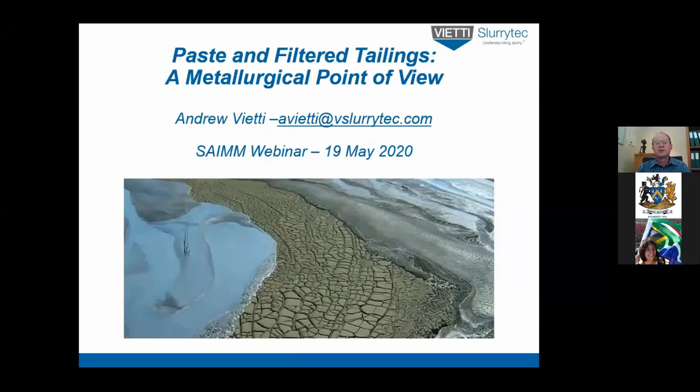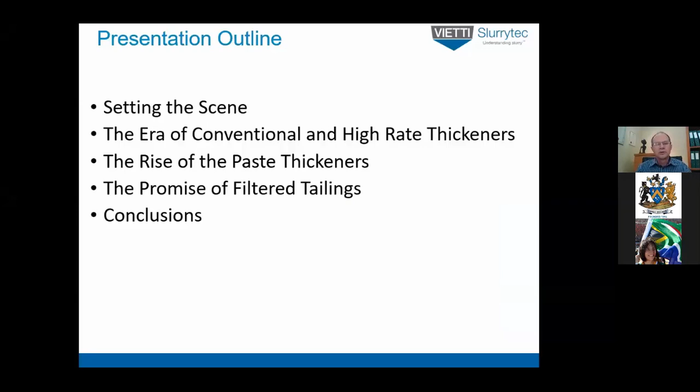Thank you very much, Isabel, for that very nice introduction, and thank you everybody for attending. Today I'm going to be talking about paste and filtered tailings from a metallurgical point of view. Just to give you an idea of what we're going to talk about: we want to set the scene, why we want to talk about this subject from a metallurgical point of view, why I think it's important. Then we'll go into a bit of a history of paste and thickened tailings, starting with the era of conventional and high rate thickeners, then lead into the rise of paste thickeners, and end off with the promise of filtered tailings, and then some conclusions.

So why do we really want to talk about this? Well, from my point of view, when people talk about paste and thickened tailings in a forum or in a discussion, it's largely viewed from a geotechnical point of view, and the metallurgical aspects, the dewatering processes, are largely sort of a sideline issue. There's a good reason for that - it's not just because people don't like metallurgy. Ultimately in this field, the tailings engineers, the geotechnical engineers, carry the legal responsibility for the tailings dam. They've designed it, they've operated it, and if something goes wrong, they take the legal responsibility for that. So it's a very important subject for them.

After the recent failures that we've all seen in Brazil, the International Council on Mining and Metals in 2019 initiated a global tailings review, which really focused on the geotechs, on how they operate these dams, what methods they use to build the dams, the ways of looking at them, reporting on them, etc. Also in early days of paste and thickened tailings, there was an initial design philosophy largely driven by the geotechs, saying that the design sequence of this tailing system is opposite to the process flow direction. So the geotech would say, I need a tailings dam that sits at a 2-degree stacking angle, and for that I need the material to have a yield stress of so much. So the pipeline and pumping guys had to design their system to handle that kind of rheology, and then it was expected that the thickeners would produce that material and it would all work.

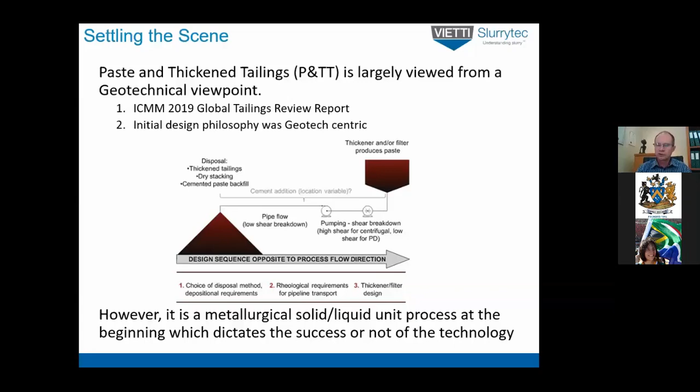So we start looking at the era of conventional and high rate thickeners. I'm going to take you back a bit of a history lesson to show where it's all originated from.

Around 150 to 170 years ago, the first centrifugal pump was exhibited in France in about 1851. Then the big steps occurred in metallurgy with Nobel and mining. Nobel invents dynamite in 1865, which led to the possibility of large-scale mining. Then the ball mill and jaw crusher were developed in Cornwall for the tin mines in 1880, giving a big jump in the amount of material you could handle for the comminution phase.

And then the really big one was flotation. The flotation recovery process started in Broken Hill, Australia, in 1902, which started the whole hydrometallurgical process. For that, water was a big component, so people started having to think about recovering and recycling that process water.

So in 1905, John Dorr invents the first thickener as we would know it. The design has largely remained exactly the same as that first thickener. There's a picture in the bottom corner showing a conventional thickener at the Bird Camp mine in Colorado, about 1920, and as soon as you look at it, you recognize that unit process immediately.

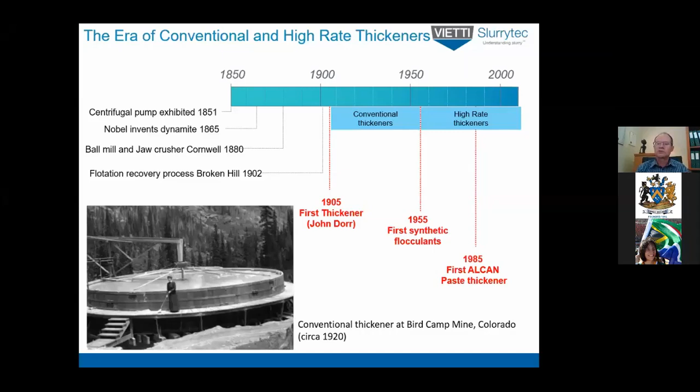So a conventional thickener is something like in the top photograph on the left: large diameters, up to around 150 meters diameter, very low flux rates - that's the solids throughput, tons per square meter per hour. They often had a center-driven rake drive, or when they got really big, they became peripheral rake drives because the torque and mechanical integrity became such an issue.

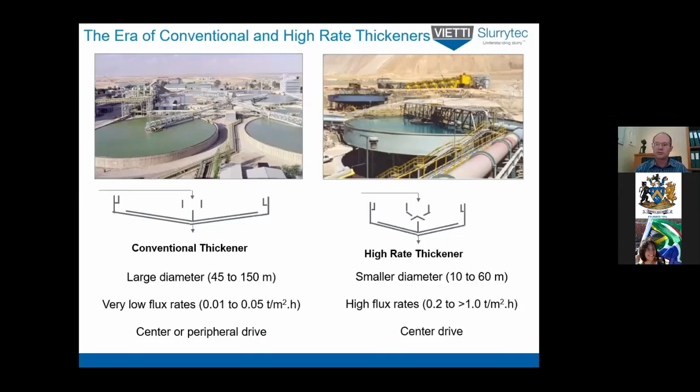After flocculants were introduced, we call those thickeners high rate thickeners, and they obviously had much smaller diameters. The flux rates were orders of magnitude more than the conventionals, and they were generally center-driven - the drive was in the center of the unit. That's kind of the workhorse; 95% of all tailings these days are treated by high rate thickeners.

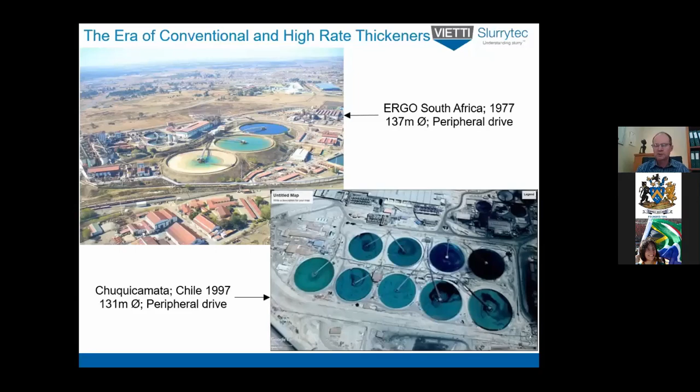Up into the late 70s and 90s even, people were using these high rate thickeners, but on a huge scale. You can see the Ergo ones now running at the DRD plant - they are 137 meter diameter peripheral drives. Big operations in Chile, like Chuquicamata, also have massive thickeners, 131 meter diameter peripheral drives. I'm mentioning peripheral drives because I want to come back to it later in the talk.

So from a metallurgical point of view, what's going on? This is a graph nicely describing the performance of a dewatering unit in terms of water loss, cubic meters per ton of head feed. As you dewater, you become more efficient, you thicken the underflow more, you recycle the water better, so you use less top-up water. Your water loss curve starts dropping down, becomes more efficient, and at the same time your underflow solids concentration gets thicker. A nice way of describing the thickness of the underflow is the sheared yield stress of that material.

This curve is particularly for diamond tailings, because I've got a lot of information on it, so it makes sense to me to do it on diamonds. If you were a typical platinum or gold miner, you'd say well, 40% solids concentration, you've got no yield strength. But this is because in diamonds, the top size going to tailings is quite coarse - around up to 1 millimeter in some cases, or generally about 500 microns. So when you've got a slurry at 500 micron top size at about 40% solids, it's still quite watery.

Just looking at the two unit processes, conventional thickener going down to high rate thickener: in the case of diamonds, at a conventional thickener you get about 30% solids out the bottom, and high rate you can easily get 45%. But if you look at the rheology of that underflow, it's still pretty watery - it's got no yield stress, so it behaves as a Newtonian fluid.

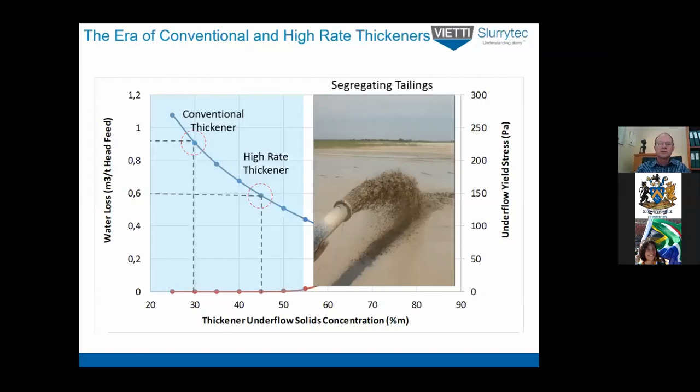So it pumps like water, and that's quite useful for the geotechnical engineers. They use those segregating properties of the slurry, of the Newtonian fluid, to actually develop their construction methods.

The coarser solids are deposited on the outside of the wall, and the fine stuff gets deposited onto the inside of the wall. That's probably a lot more stable, but also it's a bit more expensive to operate.

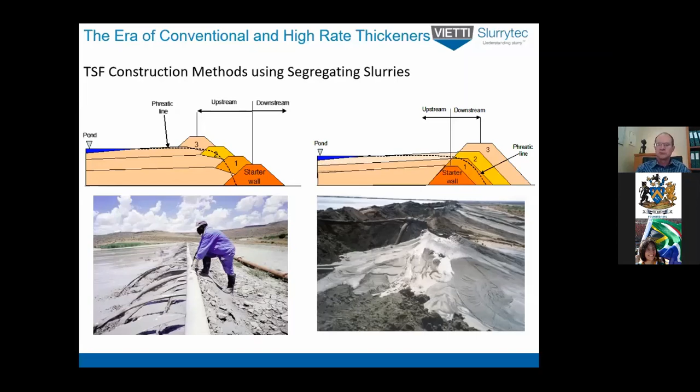That upstream method has been used extensively and very successfully, especially in South Africa. This is an example of a typical ring dyke upstream TSF, tailing storage facility, construction. You end up with a containment basin essentially, where the walls hold the structure together. It's got a concave profile, and in the center of this basin you contain the fine solids and any water that might accumulate.

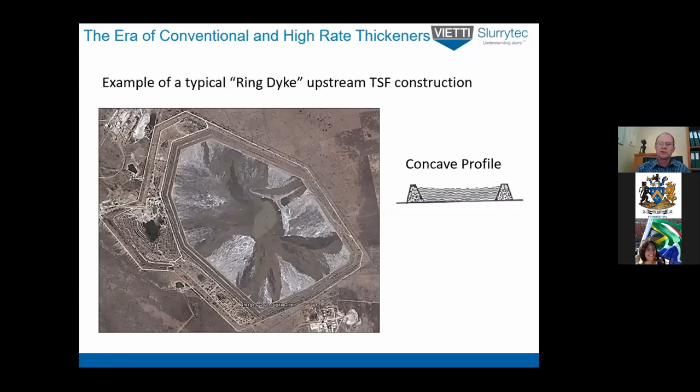These things were operated very successfully right up until sort of the early 70s or so, when things started to change. The question is, why did these start to change? Why did they start becoming a bit more risky?

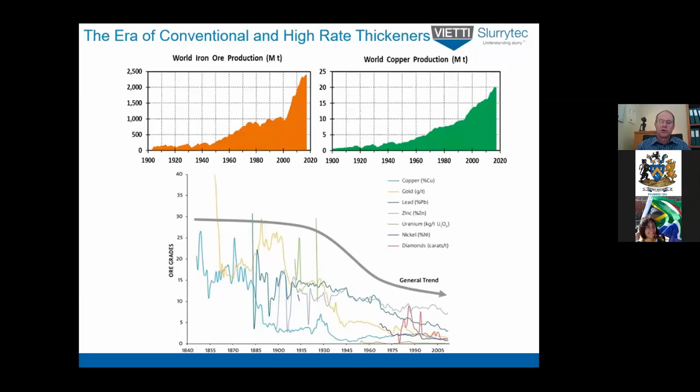It goes back really to the demand for minerals and commodities. You can see in these two curves here, this is the world iron production on the left, world copper production on the right. But from about the 60s, the demand for these metals started rising exponentially. So there was a huge demand for metals and from mining, and at the same time the ore grades were becoming poorer. So the general trend was that the ore was getting less rich, but there was still a massive demand for the metals, and so production volumes just had to increase, and obviously then tailings volumes increased.

This is some very interesting comment that was made by Andy Robertson, owner of Robertson GeoConsultants, but more importantly one of the co-founders of Steffen Robertson and Kirsten, SRK. In 2012 he said the largest mines have increased their production in terms of tons milled per day by an order of magnitude each 30 years for the past 120 years. That's quite an interesting comment.

If you look at this curve of time versus production, about 1920, in the early 20s, they were treating around 100 to 200 tons a day - that was the total production. Every 30 years or so it's been increasing up till today, where the largest mines and metallurgical plants, out in Chile for example, are producing in the order of 100,000 to 250,000 tons a day. That's 1 million tons treated every 4 days in some cases - that's a huge volume.

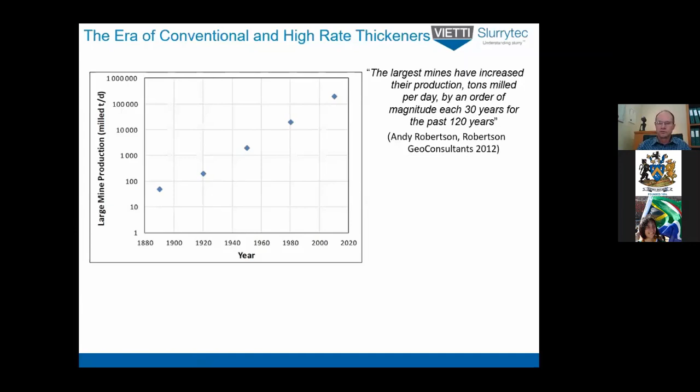At the same time, if you look at the world mine tailings failures, starting around the 60s, things started increasing. Before the 60s there were few serious tailings dam disasters, but since the 60s the numbers have been doubling every 20 years or so, and we can see the effects.

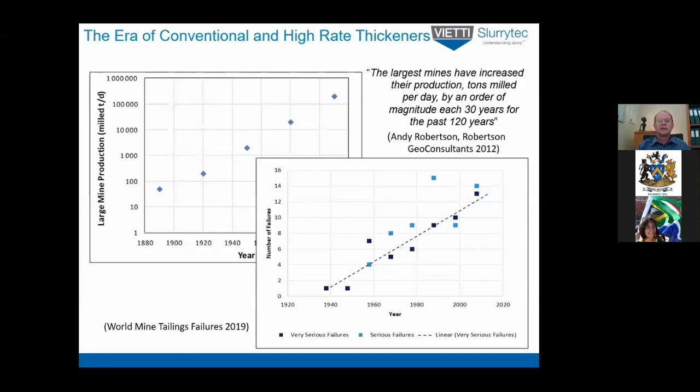Talking to some very experienced geotechnical engineers, one of the reasons seems to be that the TSF's rate of rise, in terms of meters per year, was kind of very low in the olden days, so the risk of failure was very low. But with higher tonnage, these rates of rise have been increasing, and obviously the higher the rate of rise, the higher the rate of risk associated with it. We end up more recently having a number of very serious tailings failures with the conventional method of thickening, high rate and conventional tailings disposal methods.

So for instance, Merriespruit, and they all seem to be related, not really to the technique of building the dam, but to the very fact that there's a lot of water contained on that dam. The presence of water makes these things unstable.

Merriespruit in South Africa in '96 failed because that particular day there was a very heavy downpour of rainfall, and the pool was quite big, and it managed to breach the side wall of the dam, and the whole contents failed. In Hungary, a red mud tailings dam failed, not because the containment structure was weak.

In fact, the containment structure was made out of fly ash, which is kind of a very weak cement, you can say. But because the water on the dam seeped under that corner there and started eroding away and caused the failure of the wall.

Mount Polley, the same thing. The foundations of the tailings were built on glacial till, which failed. And then obviously Brumadinho in Brazil, which was another failure because the dam also had a lot of water. The jury's still out on that one, but I'm sure it's going to come down to something like that.

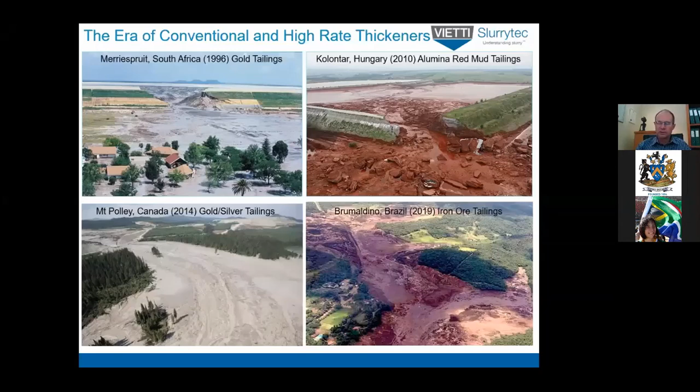So now, what can we do? This is now the rise of paste thickeners. The concept there was to develop a thickener that could dewater more efficiently to generate a stiffer tailings product.

So if we have a look at our graph again, if you were to feed kimberlite tailings to a paste thickener, you would end up with something in the order of around 60–65% solids. Now at that stage, you've got a yield stress in the order of around about 90 pascals.

And that difference now, the tailings there are non-segregating. So they do not behave as a segregating slurry. They are now a non-Newtonian fluid, and they have different flow properties.

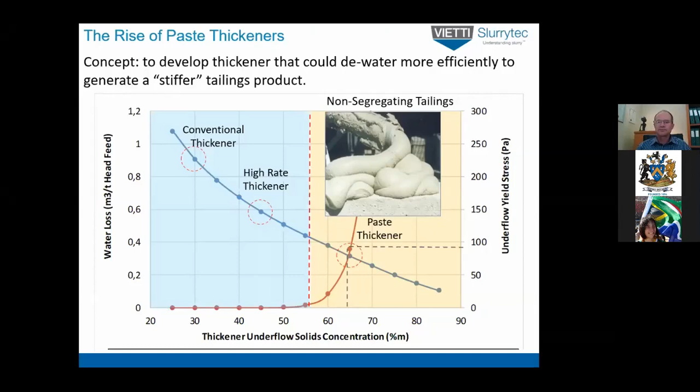On the rake, they had what we call pickets. In their case, they called them stirrers. Those enhance the consolidation properties of the mud bed. So instead of just relying on gravity to densify the mud bed, they introduced these stirrers, which could then have a little bit of shear onto that mud bed, but release the water. And so you get kind of an accelerated consolidation, getting higher solids density quicker.

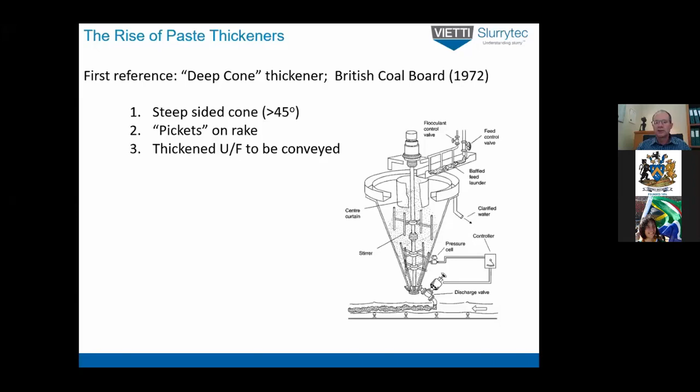And then in their idea, they wanted the underflow to be put onto a conveyor, which was really far-thinking at that time, which would be ideal if it was really true. What we found over the years is that taking a paste thickener material and putting it onto a conveyor really isn't feasible, because it's not really dry enough.

So where was it first applied? Well, the first applications found themselves in underground backfill applications using cemented full tailings. So in South Africa, people are familiar with backfill on the gold mines, where they use what's called hydraulic fill, where the tailings are basically classified.

The fines are taken out, and only the coarse material gets pumped underground, and it goes into the stope, and then it builds up like basically a beach sand. All the water runs out, and you're left just with the sand.

But in some cases, you need the full tailings because you need the extra tonnage to go underground. And the only way you can do that is to take the full tailings and thicken them up, and then add cement. That's called cemented tailings.

And the first application of that was at the Bad Grund mine in Germany in about 1971. And they achieved the paste probably by filtering their tailings. And then they added cement to that.

In Inco in Canada in the early 1970s as well, there was a mining engineer called Dave Landriault, who was very interested in paste backfill. And he actually developed his own thickener.

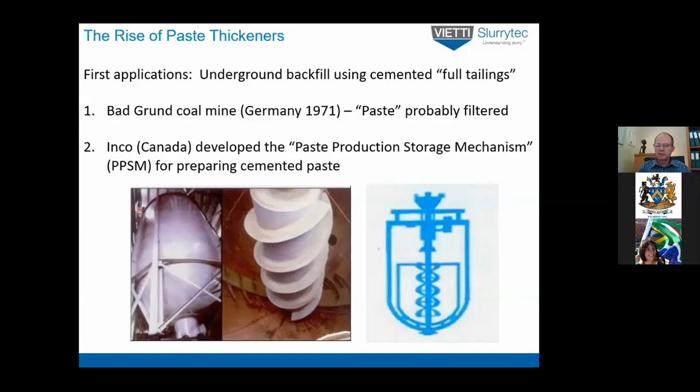He developed this thing called the paste production and storage mechanism, where you could prepare a thickened paste and then keep it moving like in a concrete mixer with that scroll. So they could add cement and keep it mixed until they needed it pumped down to the stope.

The first surface applications were in the 1970s as well, surface tailings disposal applications. And that was credited to Eli Robinski, who was a geotechnical engineer, a very far-sighted guy, who introduced the first paste tailings design at the Kidd Creek mine in Canada in about 1975.

The reason he did that was because he was forced to look at an alternative method, because the Kidd Creek mine in northern Ontario is located in an area where there's lots of muskeg. It's like a peat. And he needed borrow material to build starter walls of this dam, and there wasn't any available.

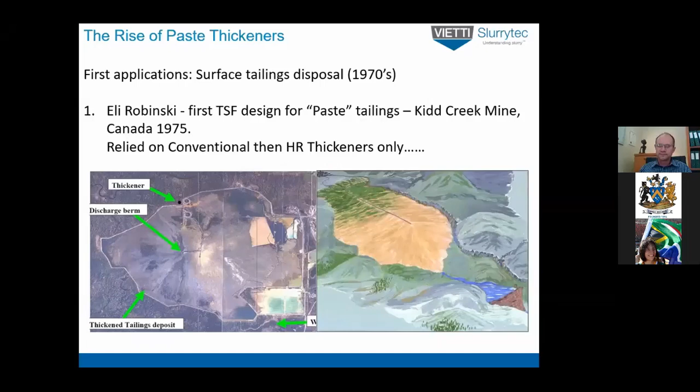So his idea, he did that, but the dewatering processes he had at the time were only high rate thickeners. He started off with a conventional thickener, and then they put in a high rate. So it wasn't really very successful in terms of its efficiency, but it was still the very first one.

But now, getting into the 80s and 90s, the first applications for surface tailings disposal and the first ventures into making a thickener really came out of the aluminium industry, the alumina industry. The two rivals there were Alcan in Canada and Alcoa in Australia. Very secretive industry, they kept all the information to themselves. They didn't want any competition.

So Alcan really developed what they termed a deep cone thickener, and they installed it in all their processing plants. They tended to be quite small diameters, sort of 10-meter diameter or less. They had a steep cone of about 30 degrees, high sidewalls, and rakes with pickets on them, which we called low-profile rakes.

And they came up with a really ingenious method, because they knew that if this material got thick enough, how do they get it out of the thickener? It became a big issue. So they developed what they called an underflow shearing system, so that the unsheared material in the tank would get sheared at the bottom of the thickener, so it would flow a little bit easier to get out.

And they had a central drive. The rake was driven centrally because of the diameter. The diameter of the thickeners were quite small, so they could get away with a central drive.

Alcoa, on the other hand, developed a high-density super thickener, they called it. And they took existing thickener design and basically made it stronger. So in Pinjarra in Western Australia, they installed this thickener. It was a 90-meter diameter, big unit. It was typically of the high rate design, so shallow cone, low sidewalls. They didn't have any pickets on their rakes, but because the rake was a box truss structure, those trusses really acted like pickets.

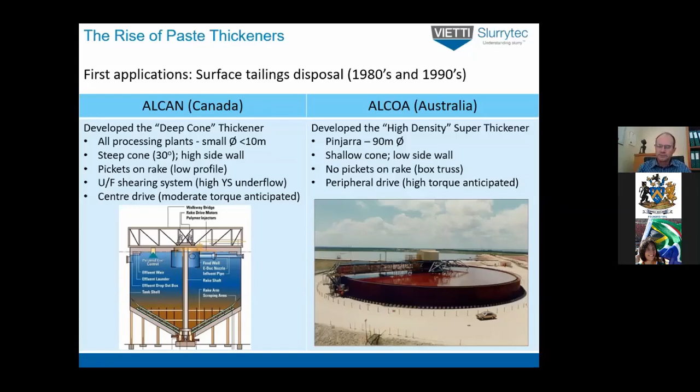So people started focusing on the deep cone. But anyway, both companies also developed their own methods for TSF construction.

So they developed what's called a central thickened discharge, or CTD method, where the thickened material comes out in the middle of the dam through some sort of fountain device, and it basically flows away and forms a hill. So you could see down at the bottom there what the profile looks like.

And then the alternative method was what's called thin layer deposition, where you would deposit the thickened tailings over a wide area, so it spreads over the land, and you layer it in thin layers that dry out. And this gave rise to also what's called down valley deposition. If you've got a valley, you could add it there, and it would run down to a sort of toe wall.

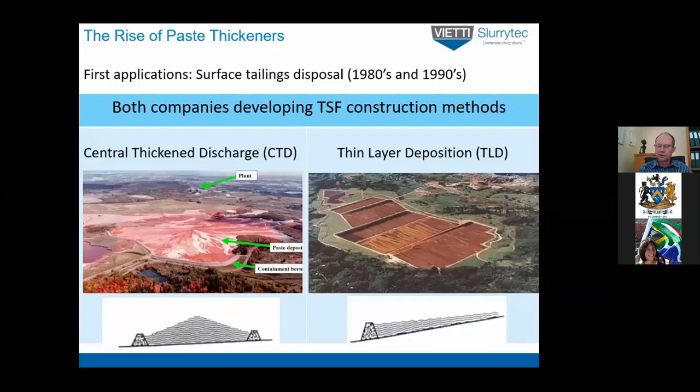So by the early 2000s, some Australian geotechnical engineers were already designing central thickened discharge dams. But again, the dewatering equipment was lagging behind. They all kind of had high rate thickening to develop the product, to generate the product.

So the two places we looked at in the pictures, there's Peak Gold Mine. You can see in the distance there, that would be the point of discharge, and then it kind of flows away. But you can see the material flows over a big distance, because it's not really thick enough to be contained or build anything of a structure.

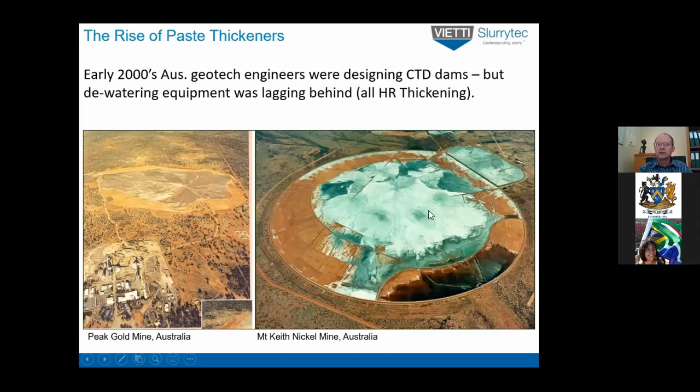And this is quite an interesting one, Mount Keith nickel mine in Australia. They had a very ingenious way. I think they had a central one in the middle, and then nine different rises around the edge to try and make a sort of hills in the landscape. That was what ultimately they wanted to achieve. But again, thickening technology wasn't there, so they didn't really generate these steep hills.

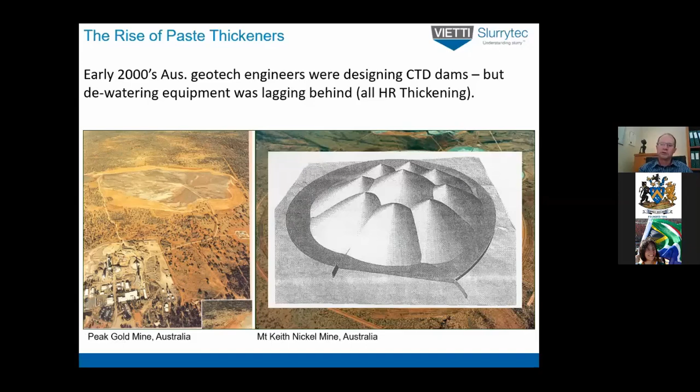So by the early 2000s, the two main paste type thickeners had emerged, and these were the so-called deep cone paste thickener, which, as you can see in the picture, wasn't very big diameter, more high sidewalls and a 30-degree cone angle, and then what's called a high density paste type thickener, which is more of a conventional design.

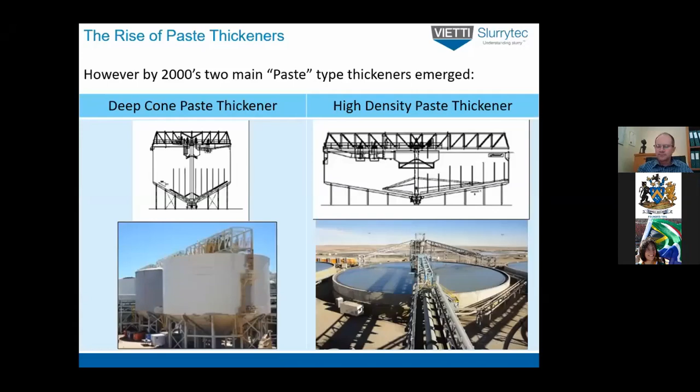So where were these applications in South Africa? This is one which is very familiar to myself - it was the ex De Beers operation at Kimberley, the central treatment plant, which is now the Kimberley Ekapa Mining joint venture plant. That was commissioned around 2000, 2001, and it was for treating diamond tailings. The feed solids tonnage was relatively high, 600 ton an hour.

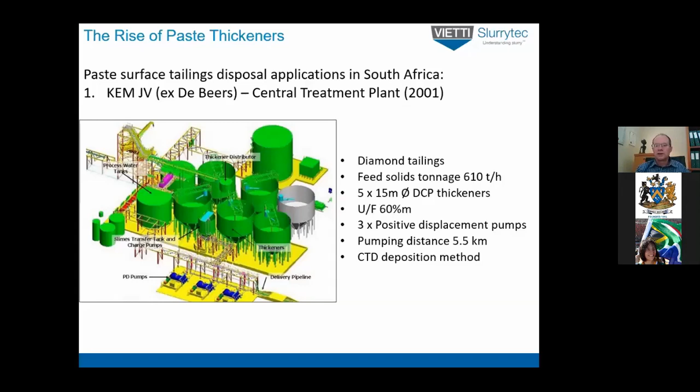There were 5 x 15-meter diameter deep cone paste thickeners installed, underflow solids concentration around 60% by mass. There were three positive displacement pumps to pump that tailings over a 5.5 kilometer distance to the deposition site. It was a central thickened discharge method, which many lessons were learned before we actually got it right. These are some photographs of the site at the deposition point.

Again, a very clever geotechnical engineer came up with this system, a unique South African design which he calls the wagon wheel. The idea was to distribute the tailings around that point of discharge, because previously the material would just flow wherever it felt like it. What he did was take advantage of what's called the plunge pool - there's a pipeline that runs underneath this ramp, it elbows up here, and basically open ends there, and the tailings flow out like a chocolate fountain in a way.

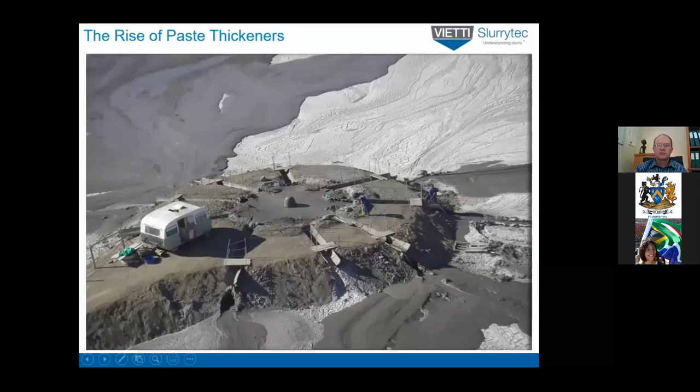It was quite nice, and it forms a plunge pool. He put spokes on this plunge pool with half pipes, and these half pipes were blocked with sandbags, and he would then lift that, allowing the flow to go in whatever direction he wanted. So that's a very nice design. There's a nice picture of how this material flows out - you can see it flows like lava. It's fantastic - very little runoff water, and it dries very quickly.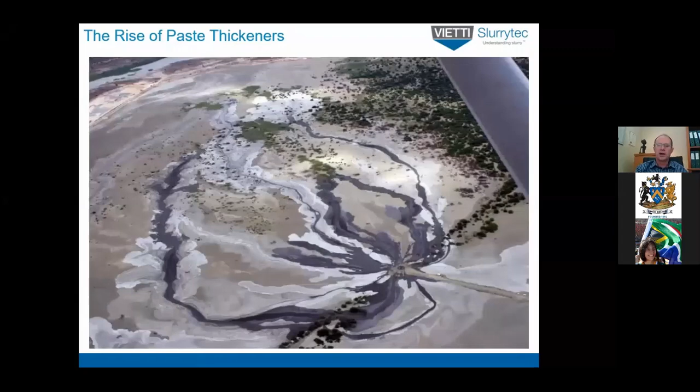I've got a small video of this here, so we'll go through that quickly. Play it quickly.

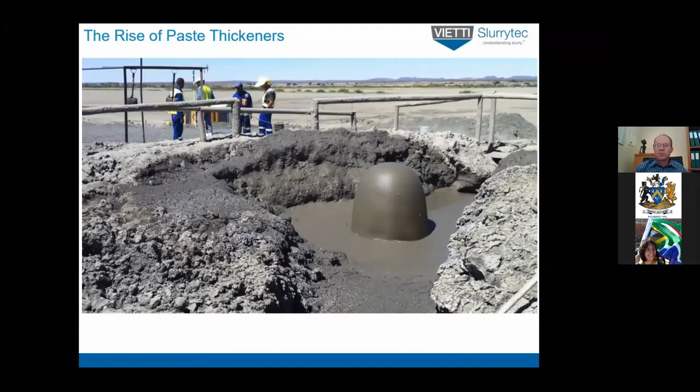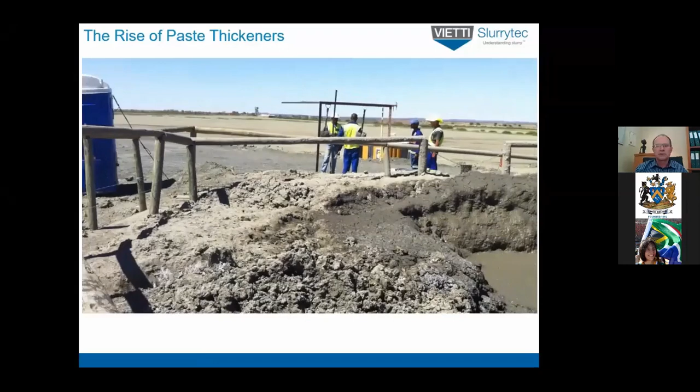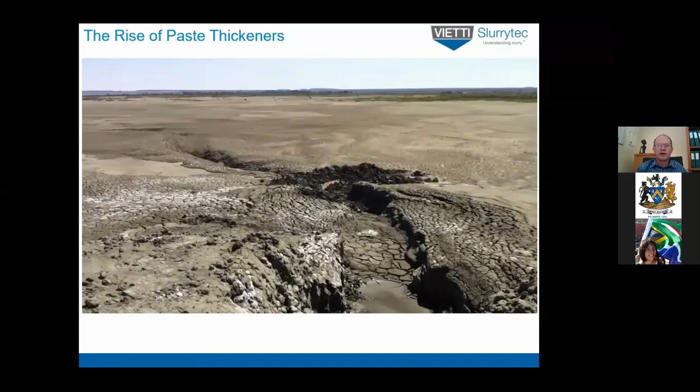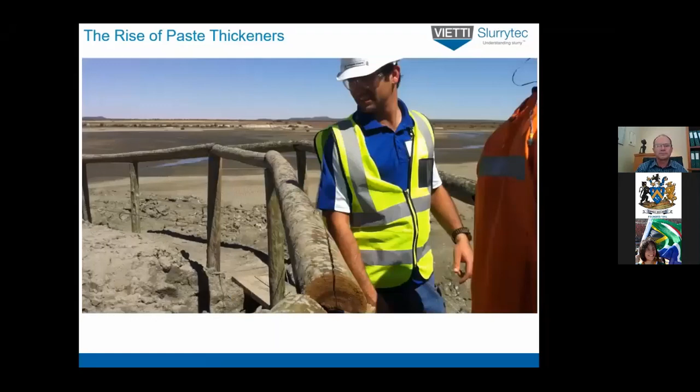So that's the end of the pipe running into the plunge pool. You can see there's no water - this dam is dry. There were obviously flows in this direction at some stage. It's a bit noisy because of the wind. This is where they were flowing out at one point, and then they let it dry. There you can see the tailings tunnel, where the new material is coming out. Okay, so that gives you an idea of how it worked.

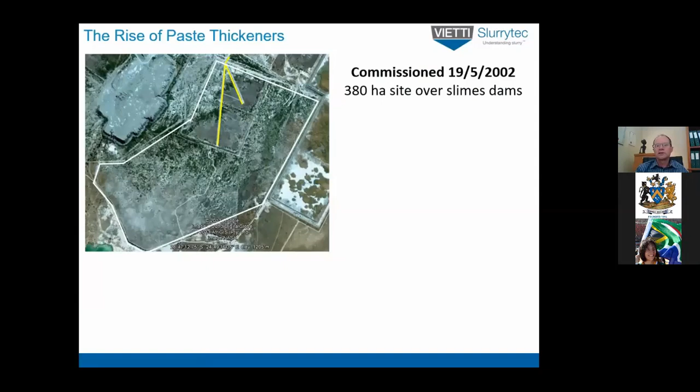It was commissioned in about May 2002 over quite a big area - it's a 380 hectare site. But the important thing is that this site has been running for 18 years and it's had one wall lift in all that time. After all that tonnage going into that dam, they didn't have to put in a new dam or anything like that. It's still running fine.

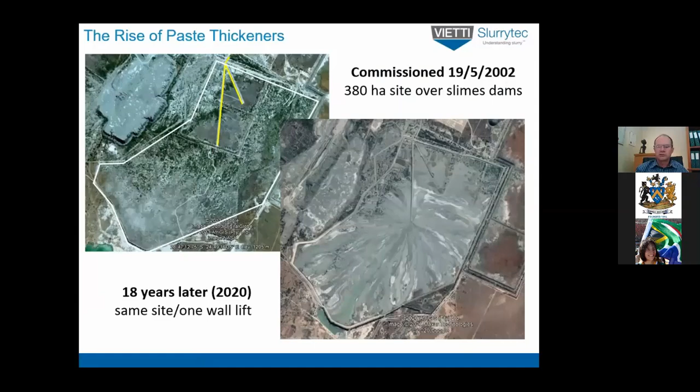Okay, so with all that, why then are paste thickeners not more widely used? We know that probably only about 5% of tailings are treated by paste and thickened tailings methods. After thinking about this, it seems like there are two main reasons for that - let's go through those.

One is the tank diameter and the aspect ratio for large tonnages. When I talk about large tonnages, I'm talking about 2,000 to 4,000 ton per hour treatment capacity, which is really limited to the big copper mines in Chile, Iran, and maybe the US.

In the early days, before 2000, when CTP was designed and commissioned, the maximum diameter you could get for a deep cone paste thickener was about 15 meters. They were too scared to build them larger - nobody had ever done that. So we were limited in terms of the number of tanks we could get, based on diameter.

Then the first big operation, Sarcheshmeh in Iran, was designed and built, and they could only get 24-meter diameter thickeners. So it had gone up from 15 to 24 meters, and they got twelve 24-meter paste thickeners installed at that stage.

Finally, then in the sort of 2013-14 or so, at the Centinela copper mine in Chile, we managed to get of the order of 45-meter diameter. So they put in 3 45-meter diameters.

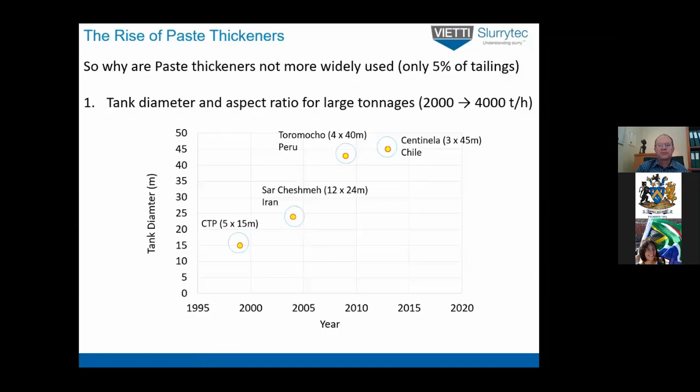So it kind of becomes impractical to have this thickener, the deep cone paste, for very large applications. And it makes more sense then to go for the high density paste kind of design.

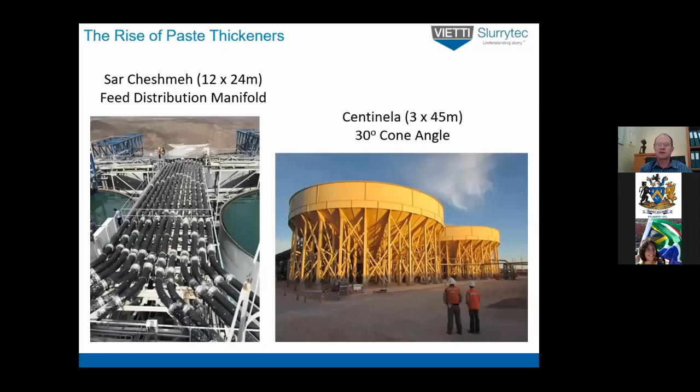The other one is what I've called the small matter of rake torque. This is quite important when people start talking about definitions again. In most definitions, when you see a yield stress curve, it's the sheared yield stress curve. Because the pump and pipeline designers and the geotechnical engineers, they deal with material that's gone through a pump and been sheared all along the pipeline, and it ends up at the tailings dam in a sheared state. So they're interested in the sheared yield stress of the material.

While the thickener guys are more interested in the unsheared yield stress of the material, because that's what the rake and the rake gear drive sees. So for a typical paste material, it's got a sheared yield stress of about 100 pascals at a particular solids concentration, which would be, let's assume, the design solids concentration. When you look at the unsheared yield stress, that can be at least 2 or 3 times greater than the sheared yield stress. So what the rake drive has to see is huge yield stresses, and so the gearboxes have to be really, really strong.

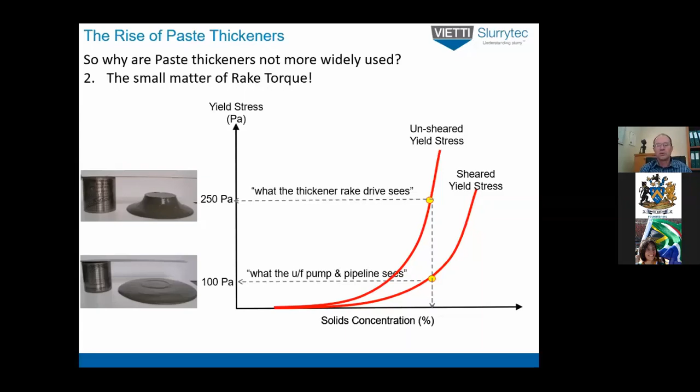Now it becomes quite interesting, because the way it's conventionally calculated or designed in the industry, the size of a gearbox for a particular application, is using this very simple equation. We must remember that these calculations were derived in the days of conventional and high rate thickening, where the slurry generated tended to be a Newtonian fluid. It didn't have too much yield stress, or if it did, it was pretty low.

So the calculation states that the maximum operating torque is defined by K, which is really an empirical number developed by the early thickener guys, times the diameter squared of the tank, times a factor which brings it to SI units. Now, in paste thickening times, K has been approximated or replaced by the approximate unsheared yield stress of the underflow at the target underflow density that's required. So you would go into the lab, measure the unsheared yield stress of the material at the target or design underflow density, and that would effectively be K.

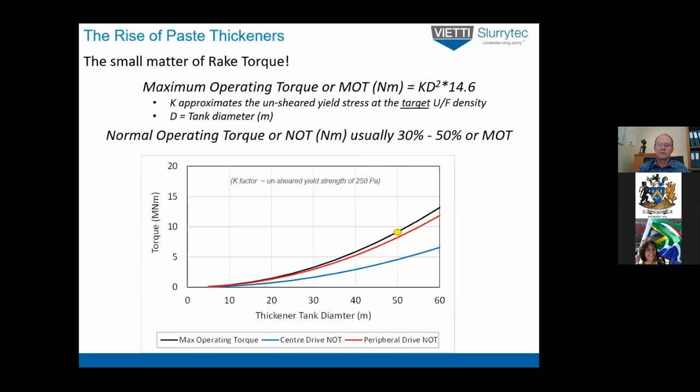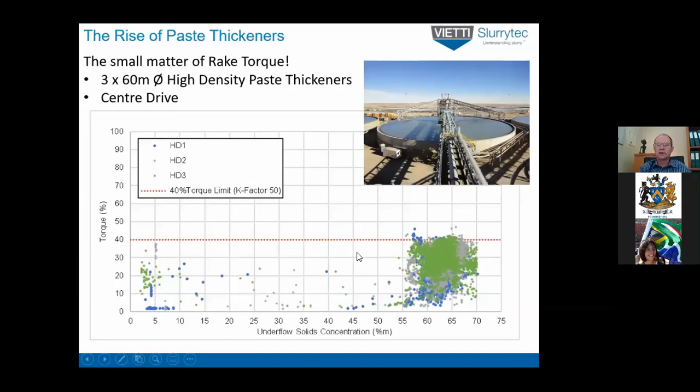To bring this fact home, in a particular mine there are three 60-meter diameter high-density paste thickeners with central drives. The data at the bottom shows underflow solids concentration generated by those thickeners versus the rake torque they were operated at. The design underflow solids concentration the mine wanted to achieve was around 69-70%, but these guys were told never to run more than 40% of the rake torque, so they basically operated within this range. As the underflow density picks up, it's been cut off because the operators were told never to run above that.

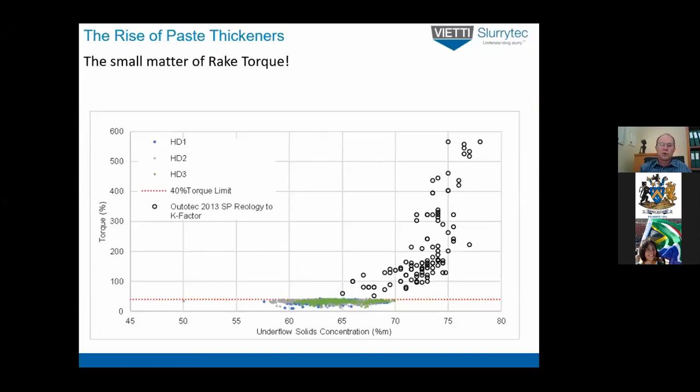So what ultimately we have to do is look at bigger torques for these paste thickeners, central drive paste thickeners. Going full circle, for very large tonnage operations it's probably better to go for a high density type paste thickener design with a peripheral rake drive, like was done in the early days. You have to go through these lessons, learn, and then look back and say the guys did have a good idea in the old days.

For smaller applications where you don't need such large diameter paste thickeners, probably look at larger central rake drives with higher rake torques. And then obviously link torque to control, because that was probably the best control method you can go with.

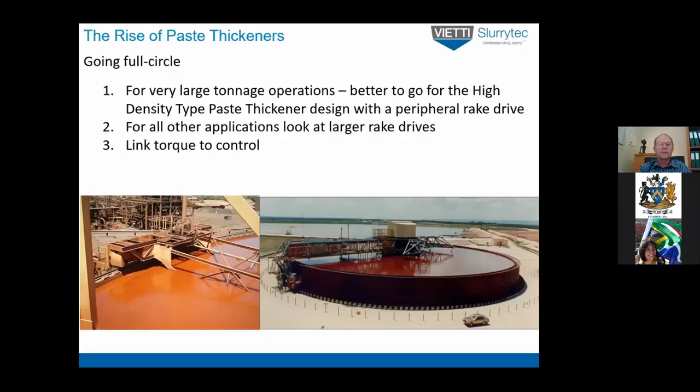So where are we now? We're looking at the aftermath of Brumadinho. The ICMM initiated a global tailings review and developed a positioning statement for the governance of these TSFs, which is really all about how people look after them, how they're checked, the checks and balances around these dams—not too much really on the dewatering technology. Most of the major mining houses have now disclosed all of their TSFs, how they run, what methodologies are used to build them, at the request of the fund managers.

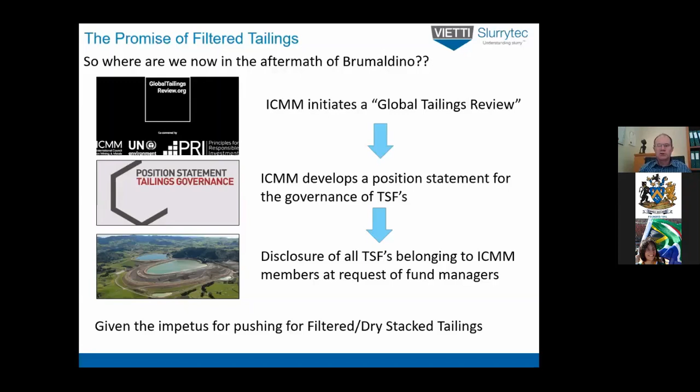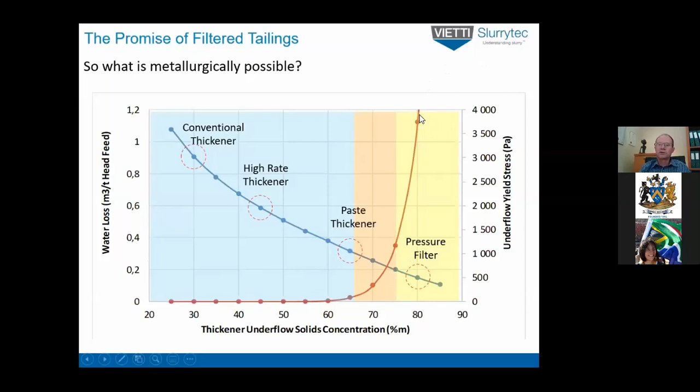So really, what is metallurgically possible? It's possible to filter anything, as long as you've got big enough filter pressure behind it. This is an example of filtered tailings for kimberlite. You can get way down to high percent solids, 80% solids, and massive water recoveries with a pressure filter running at about 10 bar pressure. In this case, your yield stress would be in the orders of kilopascals, so that's thick enough to go on a conveyor belt.

So we've got two extremes now. You've got the paste thickener, which can give you something where you can still use a pump, but on the pressure filter side, pumping is not an option anymore and you have to go conveying. But between those two zones is something I call the danger zone—anything higher than about 500 pascals, which is difficult or almost impossible to pump, but lower than about 2 or 3 kilopascals, it looks thick but doesn't behave thick.

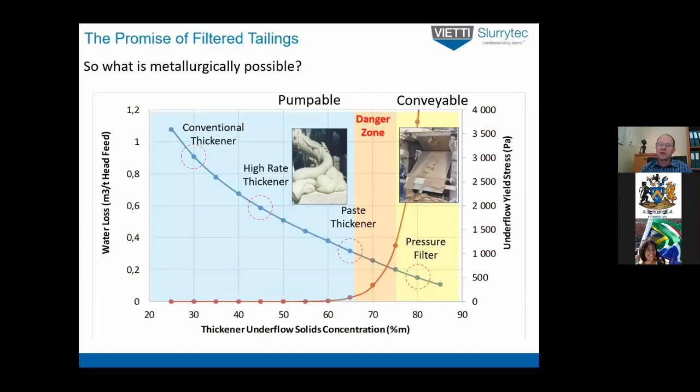So it looks like something like that. This material, as soon as it comes out of a filter, looks pretty good and seems like it can convey nicely. But as soon as you put it on a conveyor belt, it starts to fall apart, and it's too thick to pump also. So there is some sort of danger zone that metallurgists really have to be aware of, and they need to consider what transport method to use.

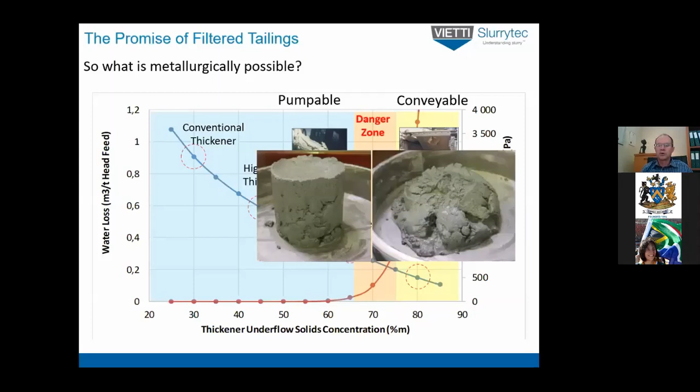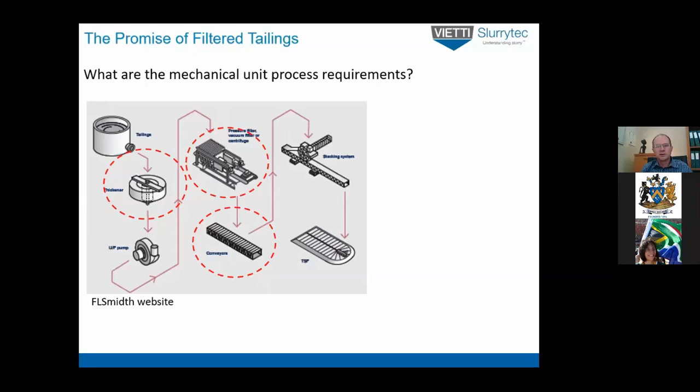So what are the mechanical unit process requirements for filtered tailings? Well, you need a thickener before the filter, because filters like something that's relatively thick. They don't like a very low density slurry. So you would have to have some sort of thickening device. Then you would have your filter, and then a conveyor and a spreader to spread that material.

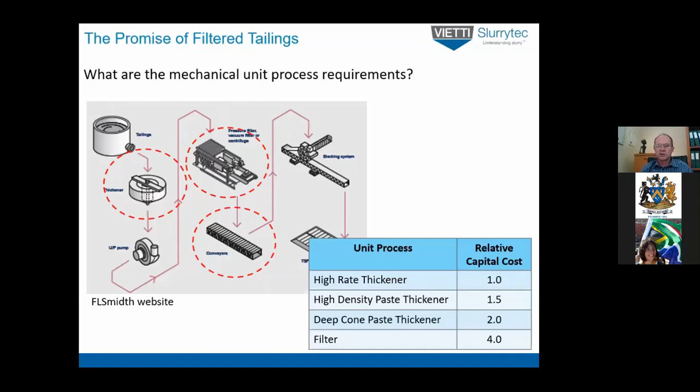And obviously capital costs then come into it. So this is just a relative comparison of capital costs there. High rate thickener, if it was 1, the high density paste thickener would be about 1.5, deep cones about 2, and the filters about 4. So you can see costs rack up very quickly when we look at filtered tailings.

And it's used, where is it used? Well, I've seen reports where it's only used in about 1% of all tailings disposal applications. And it's typically in areas where raw water is not available or extremely expensive. When we talk about extremely expensive, it's more than $3 per cubic meter of raw water, or where the need for product recovery is very high. And it's relatively small tonnage operations.

So the two at the bottom there, which are most quoted, is La Coipa gold mine in Chile, which is a completely dry and filtered tailings operation. And then one much closer to home is this Skorpion Zinc operation in Namibia, where they use filtered tails and then deposit it using a conveyor belt. The largest treated plant now apparently is treating about 1,200 tons an hour, which is really quite a big tonnage for filtered tailings applications.

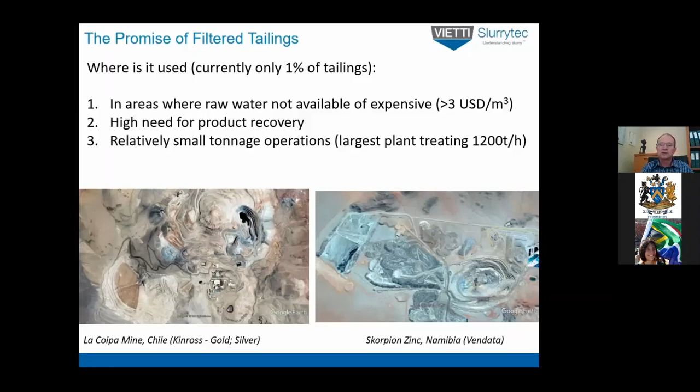So the limitations really are the mechanical side of things, which I think are improving greatly. Now you get machines that are treating, each machine can treat between 300 and 400 tons an hour. Examples are the FLSmidth Colossal unit, which is, I think each plate is 4 meters by 2 meters. They're now also developing something that's astounding, it's like 5 meters by 3 meters, I think. And then the Metso VPX series also can treat these massive tonnages.

And the other thing is, you've got to look at the slurry properties. If you can play around with the clays which are contained in these slurries, you can increase the permeability, and then you don't need so many machines, and it's a lot easier. You don't need such high pressures, etc. So if you can condition a slurry from an unconditioned state chemically in the process water, you can change something that's difficult to filter to something that's probably easy to filter.

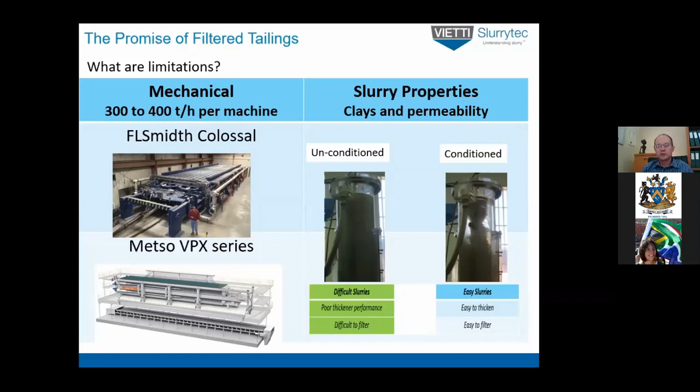So a lot of information there, but let's just go through some conclusions. Really, we can see that in the past 20 years or so, dewatering technology has advanced greatly, much greater than the previous 20 years. And on the paste and thickened tailings side of things, we can still see there's room for improvement, particularly on the rake torque drive issue. But I think once that's ironed out long term, and people gain confidence in it, then I can see paste and thickened tailings becoming kind of the bog standard method for dewatering tailings.

On the filtered tailings side, there's still a lot of learnings to be had, I feel, and probably a lot of lessons to be had. I think it's great for niche or smaller applications, but in the longer term, for large applications, we're going to see more of these hybrid paste filtered methods, where you paste maybe 70% of your tailings and filter 30% to achieve a kind of optimum that you need.

Yeah, so I think overall that's the end of the presentation. I'll take any questions if there are any.

Andrew, thank you very much. As a pyrometallurgist, that was very enlightening for me. I learned a lot. So we have a very interesting comment here as well in terms of...